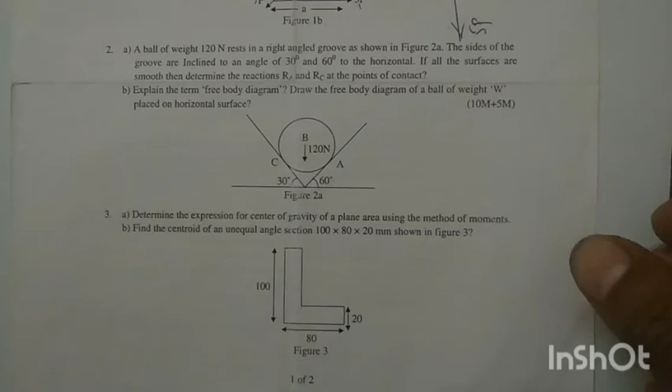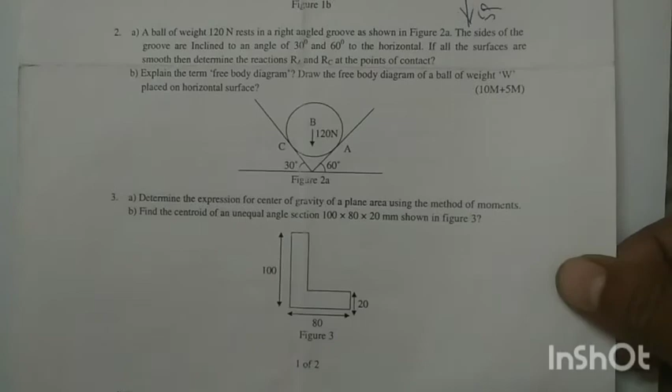Let's go into the problem. Problem number 1: find the centroid of the plane lamina shown in the figure. All dimensions are in mm. So we have to find the centroid of the given plane lamina.

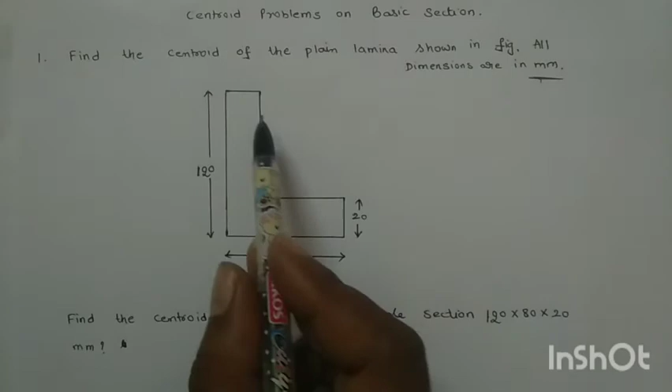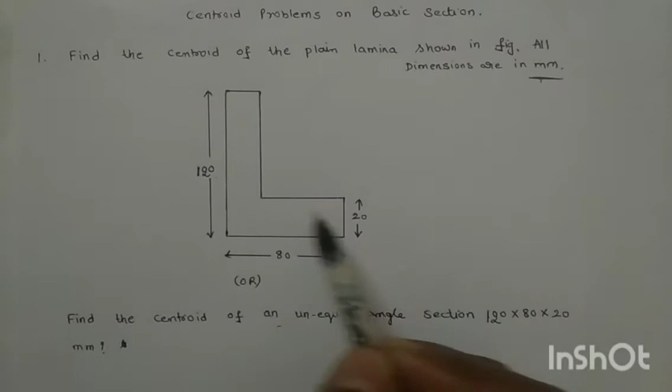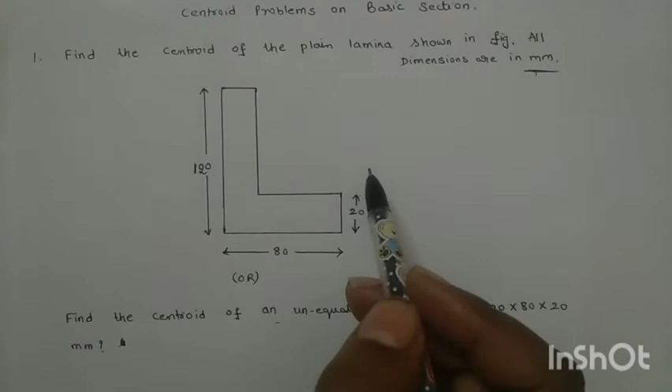Here the plane lamina is in the shape of L, so it is also called an L section. The dimensions are mentioned here, but the units are not shown in the diagram - you should consider the units are in mm. The same problem can also be given like this: find the centroid of an unequal angle section 120 into 80 into 20 mm.

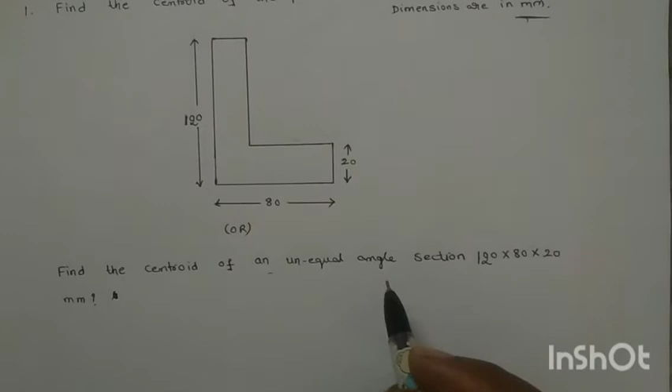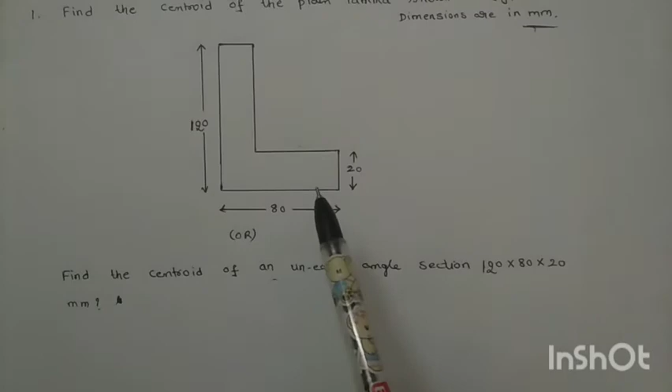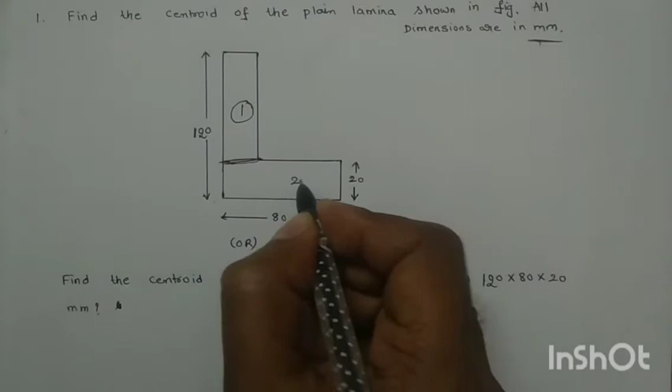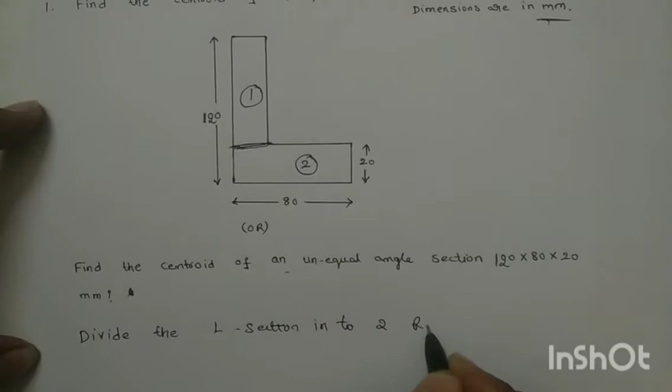See how I will divide it here - if you join a line here, right? So the total L section is converted into two rectangles. Name it here - this is the first rectangle and this is the second rectangle. So write down: divide the L section into two rectangles. The second important thing to solve the problem is the location of the origin.

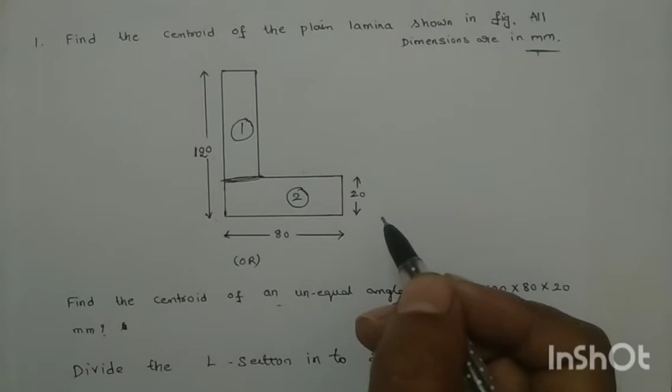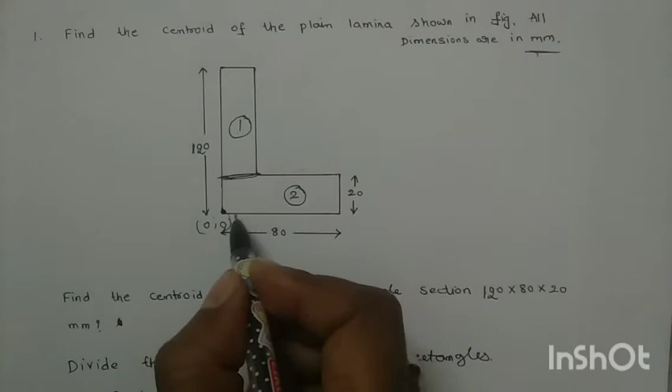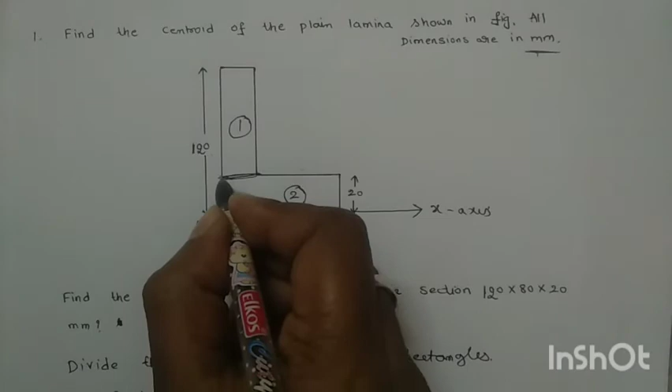The location of the origin means we have to find the centroid position with respect to the reference axis. For two-dimensional sections, the reference axes are x and y axis. Suppose if you want to get positive values of the centroid position, consider the left lower corner as the origin point 0,0. Then the x-axis passes through the base of the L section, and the y-axis passes through the left vertical side.

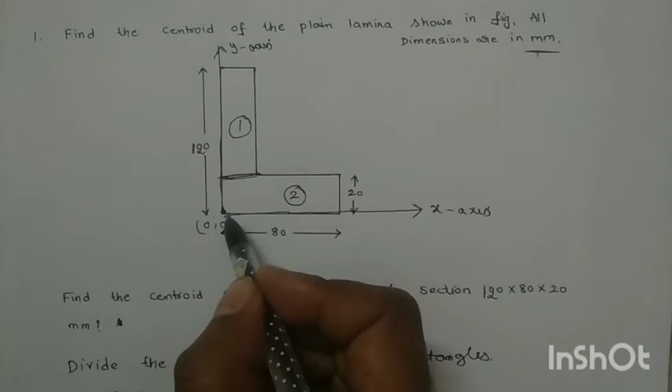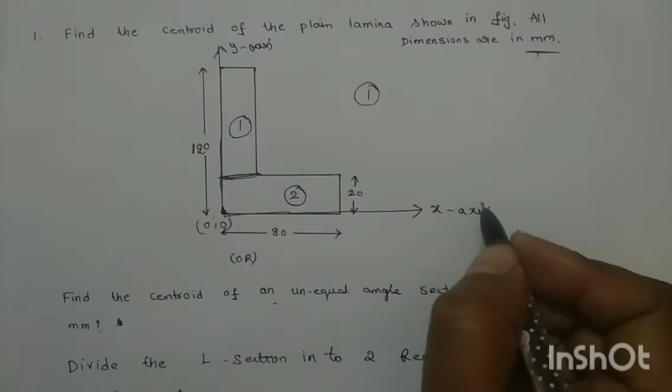So first here you locate the x-axis and y-axis as per the origin position. We consider the origin position as the left lower corner. Then the entire diagram will be in the first quadrant. If it is in the first quadrant, x values are positive and y values also positive. So that's why the position of the centroid will be positive values.

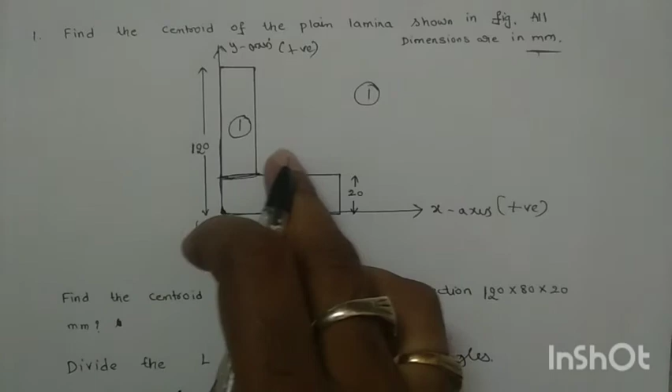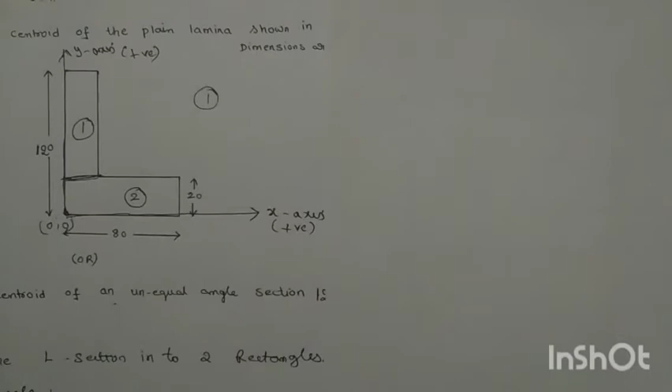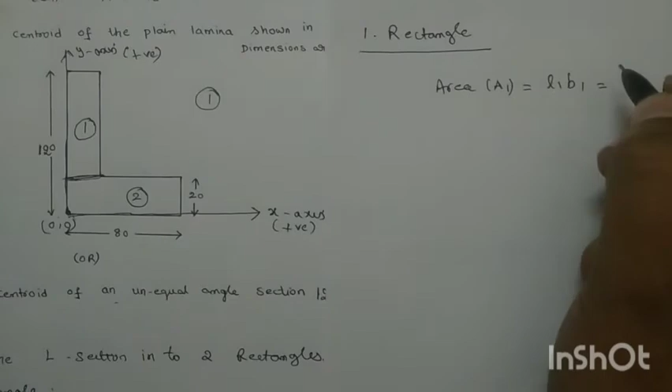Okay, now after locating the x-axis and y-axis, find the areas. Now take the first rectangle and find its area: A1 equal to L1 into B1. What is the length of the first rectangle? See, this is the first rectangle, the length here - this is the length of the first rectangle. How much is it? 20 is given. Here also 20. Then what is the height here?

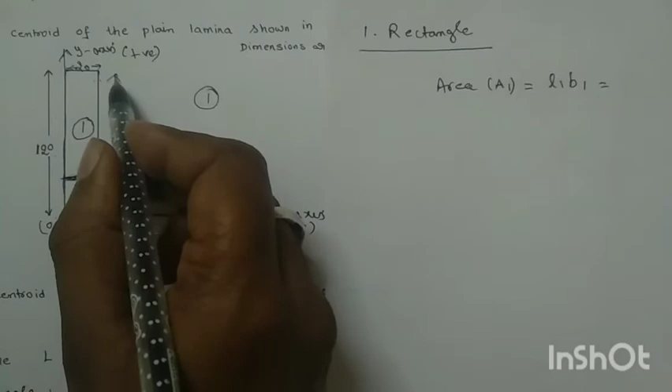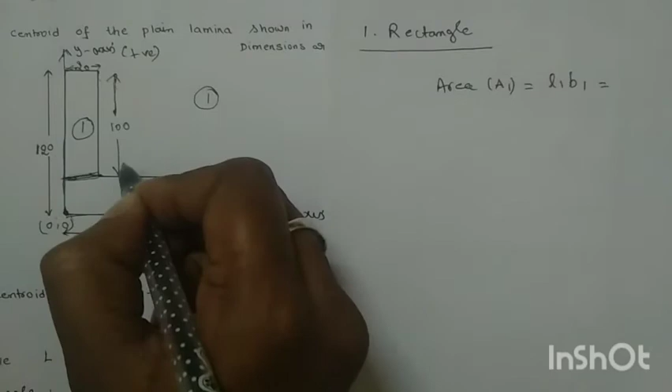The first rectangle's height will be - here the total height is 120. Out of 120, this height is 20, so the remaining height is 100 mm. Now for the height and width, see 20 into 100. So write down 20 into 100, that is 2000 mm square.

And find x1 and y1. So you should know what x1 and y1 are. Here x1 means the centroidal distance, the centroid point's distance from the y-axis of the first rectangle. Y1 means the centroid point of the first rectangle from the x-axis. Remember that the distance from the y-axis will always be in terms of x.

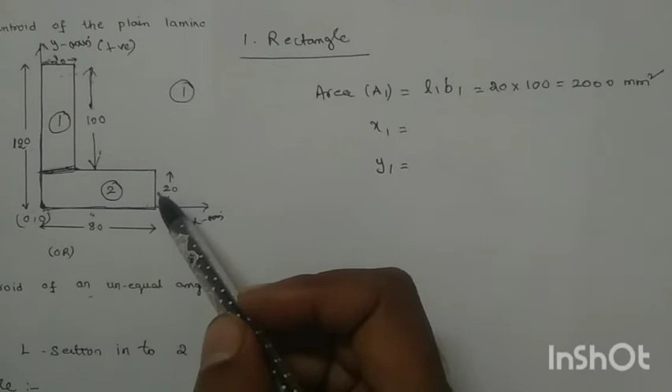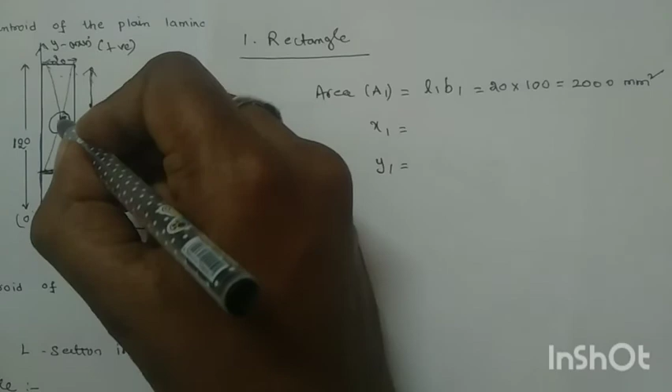Similarly, the distance from the x-axis will always be in terms of y-axis. Now, the rectangle's centroid position is the intersection of diagonals. So draw the diagonals and identify the CG point. This is the CG point, and this is the CG point.

So now x1 means centroid distance from which axis? From the y-axis, for the first rectangle. What is the distance? The total is 20, so out of 20, take half the distance. That is 20 by 2, which is 10 mm.

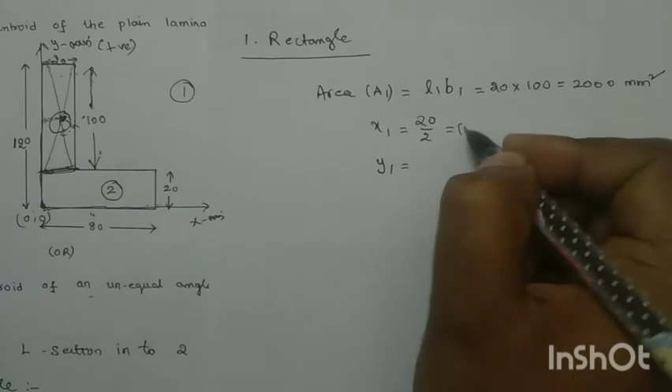Similarly, y1 means centroidal point distance from which axis? From the x-axis. So what is the distance from the x-axis up to the point? First you should move up to the base, that is 20.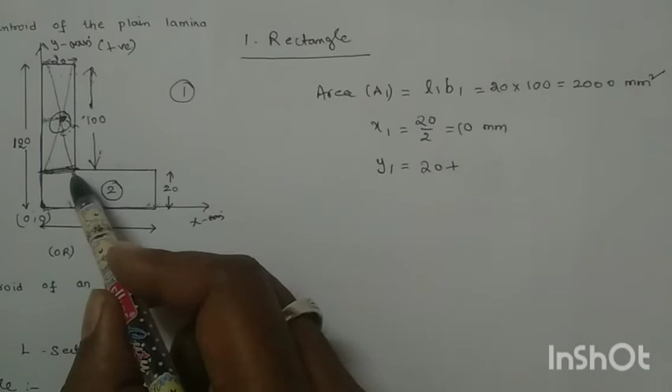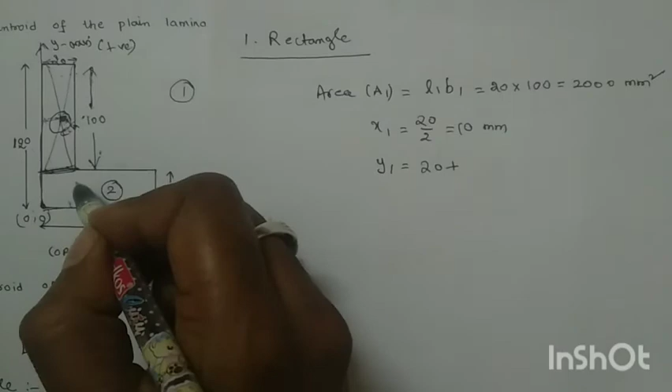After moving 20 distance from the x-axis, what is the distance from here to here? That is total 100. So here we should move only half the distance, because the centroid CG point of the first rectangle is located here. So take half of 100, that is 100 by 2, which is 70 mm.

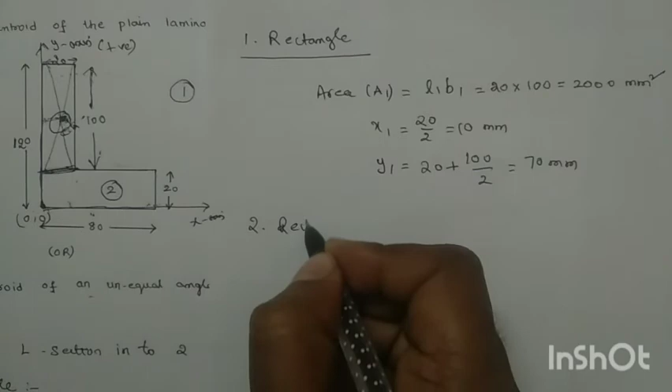And coming to the second rectangle, the area of the second rectangle is represented by A2, that is L2 into B2. What is the length of the second rectangle? 80 into width of the rectangle is 20, that is 1600 mm square.

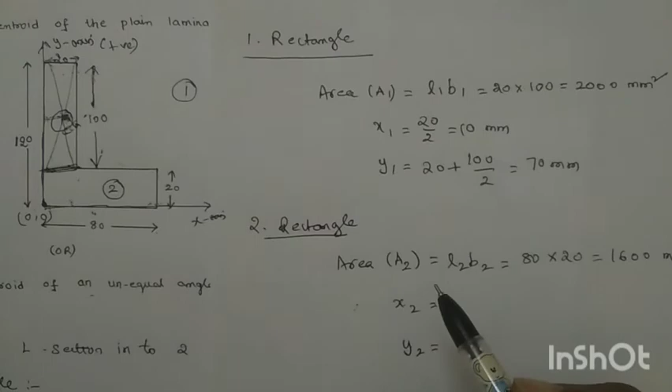And find x2 and y2. Similarly, x2 means centroid point of the second rectangle from which axis? From the y-axis. Why? Because x means distance from y-axis, y means distance from x-axis. Similarly, you can identify the centroid point of the second rectangle.

So draw the diagonals of the second rectangle. If you draw the diagonals, the intersection point is the CG point.

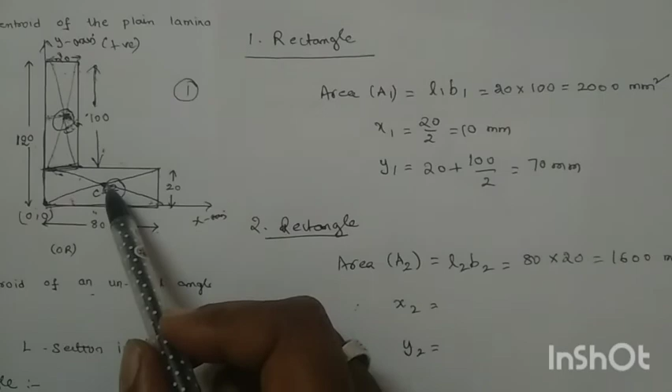Now, the centroid distance from the y-axis up to the centroid of the second rectangle. What is the distance? This distance will be half of 80, because the total length is 80. From the y-axis up to this point is 80 by 2.

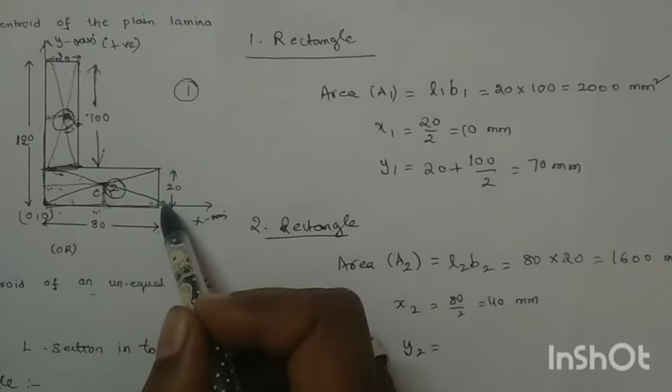40 mm. And similarly, this is the CG point of the second rectangle from the x-axis up to this distance. How much distance is it? The total distance is 20, so you should take half the distance, that is 20 by 2, which is 10 mm.

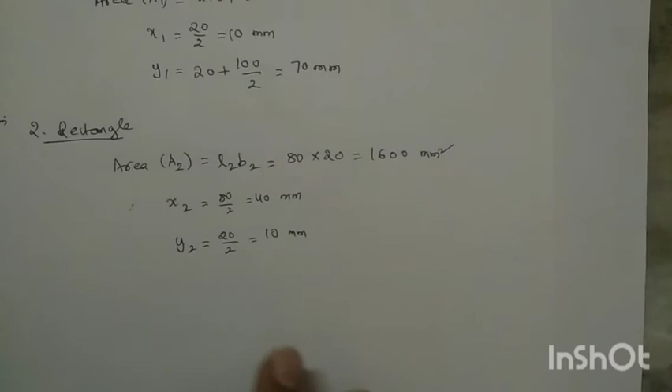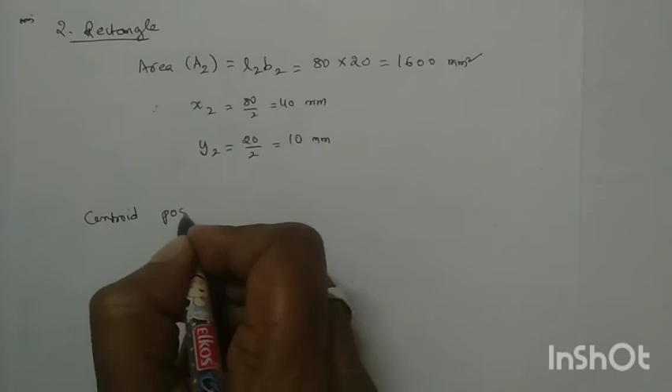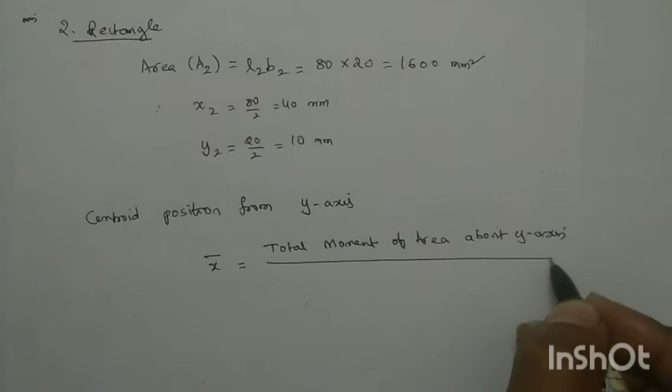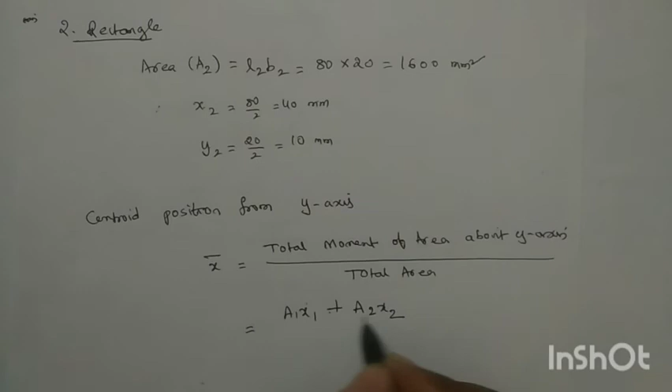Now write down the centroid formulas. Centroid position from y-axis is represented by x bar. X bar means centroid position from y-axis, that is total moment of area about y-axis divided by total area. The total moment of area will be A1 x1, that is the moment of area for the first rectangle, plus moment of area for the second rectangle. This is the total moment of area divided by total area, A1 plus A2.

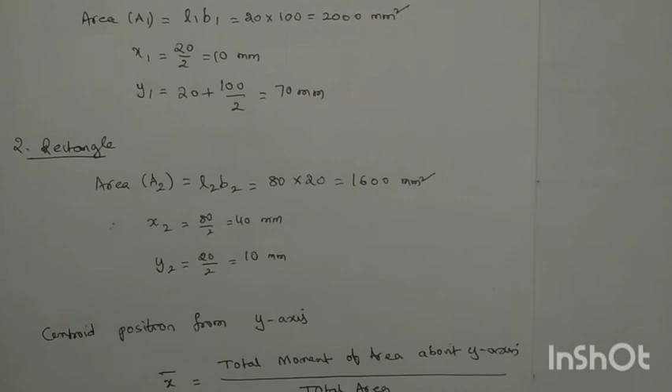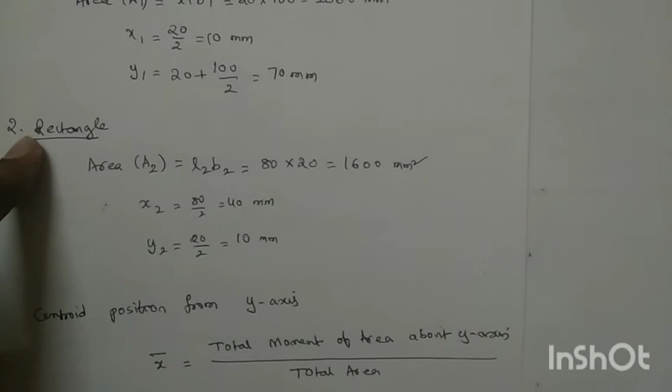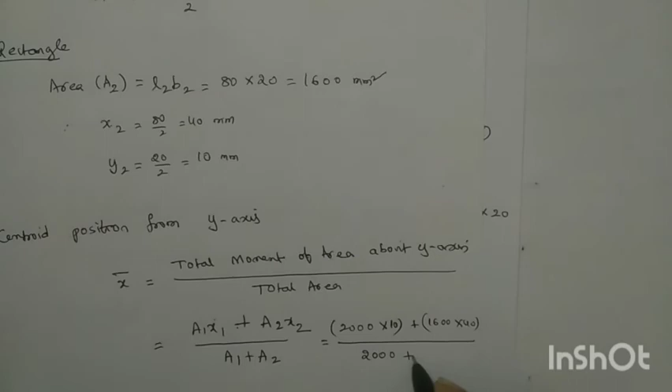Okay, now substitute the values. A1 equal to 2000 into x1 equal to 10, plus A2 1600 into 40, divided by A1 equal to 2000 and 1600. Now if you substitute these values, you will get the answer, 23.33 mm. That is x bar equal to 23.33.

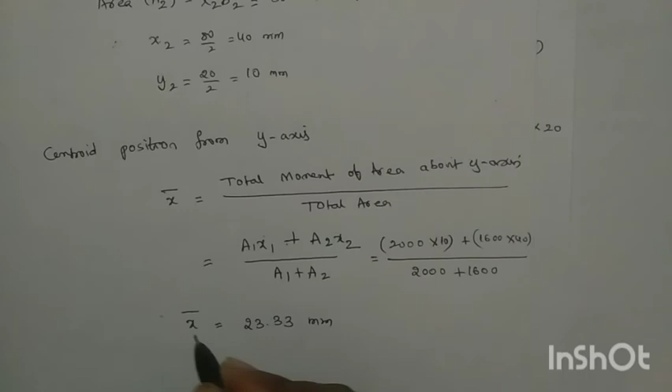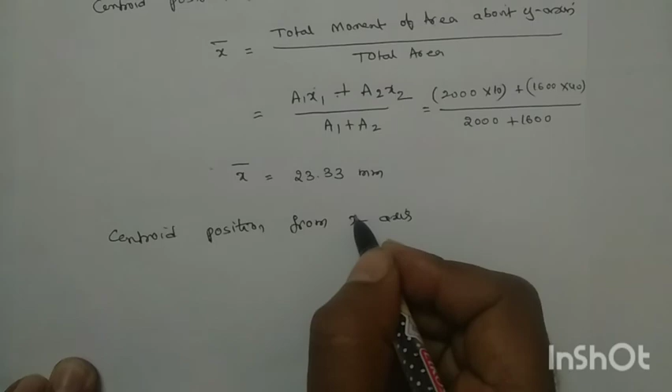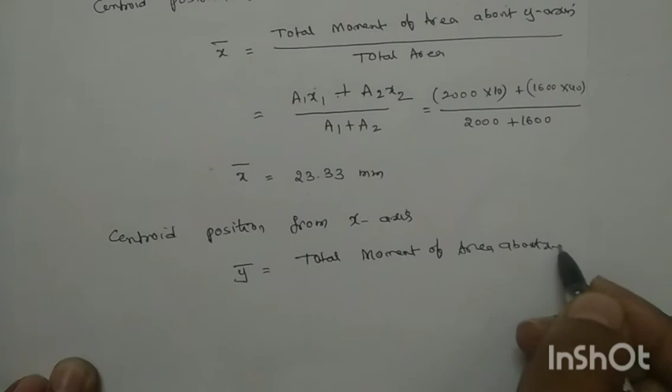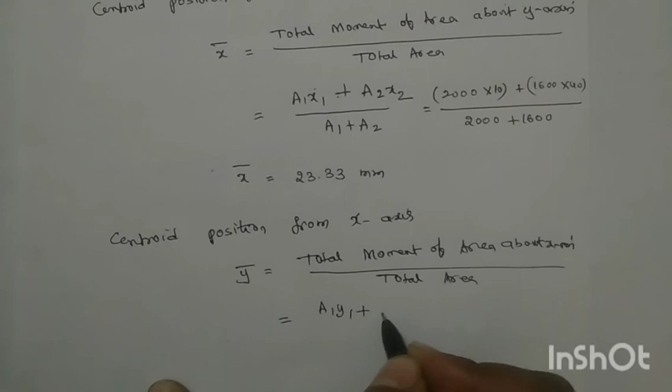And similarly you can find y bar, meaning centroid position from x-axis, represented by y bar, that is the total moment of area about x-axis divided by total area. That formula will be A1y1 plus A2y2 divided by total area A1 plus A2.

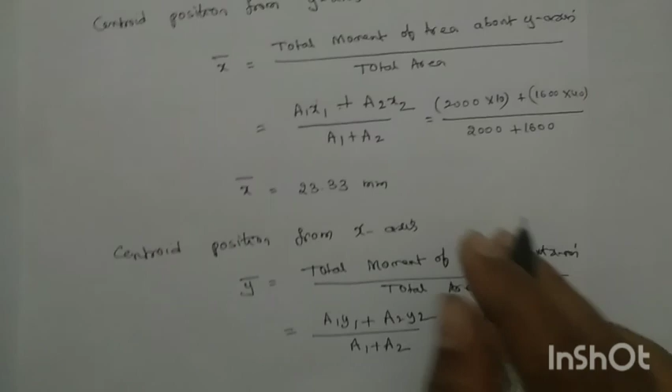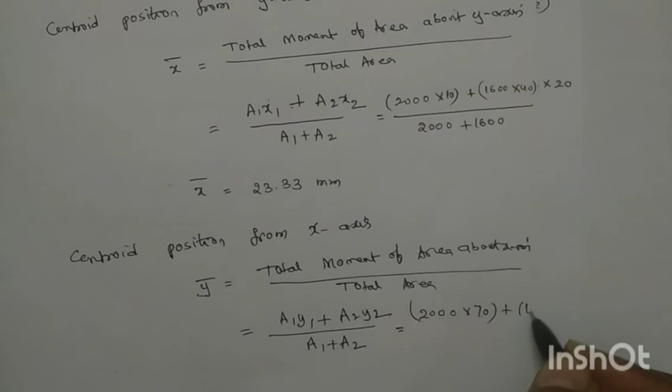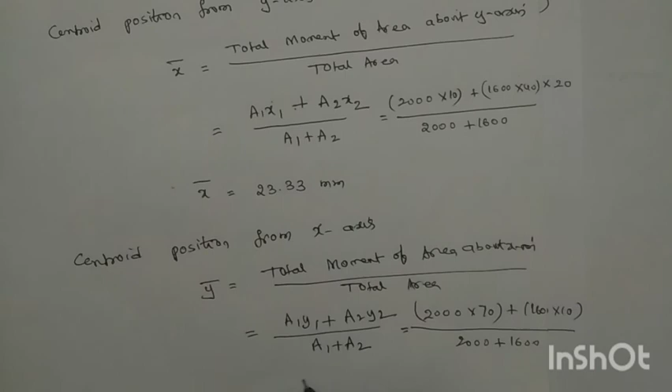That is A1 equal to 2000 and y1 is 70, y2 is 10. So A1 into y1 70, A2 1600 into 10, divided by 2000 plus 1600. Now if you substitute these values, you will get the answer 43.33 mm. This is the y bar.

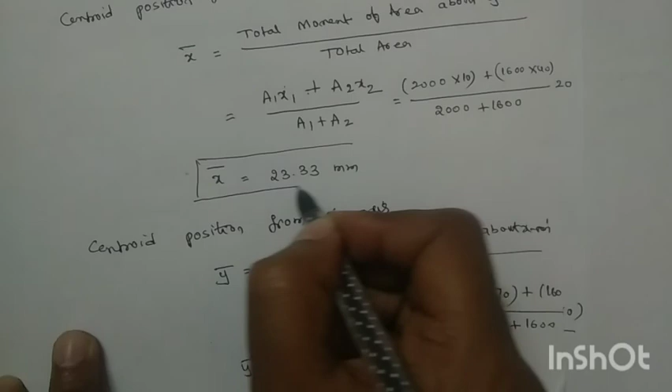Write this one down in the box, and this one also write down in the box. These are the final answers, that is x bar and y bar values.